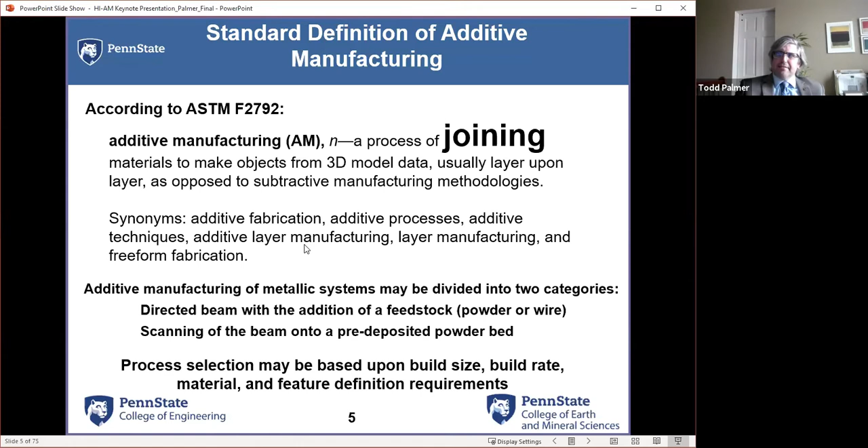So it's important to keep that in mind when we talk about welding and related topics. There's a whole range of different things—I'd be remiss if I didn't show the robotic hand from our friends at the Manufacturing Demonstration Facility at Oak Ridge, along with some other examples and work we've done at Penn State.

This was one of my most motivated undergraduate students. That was a front upright for a Formula SAE car that was designed and fabricated out of titanium. This student was also a great salesman, I would say, as he convinced EOS to fabricate this part for him for no cost. So he was a very good student.

It was very much a design exercise, but it came out being a very intricate type part, and into these large bulky components.

Now this is an electron beam, or what a lot of people will call a Sciaky type system, mostly because Sciaky builds the electron beam systems. It's an electron beam welder with a wire feeder, or in this case, two wire feeders. And what they're building here, in all likelihood, I can't say for certain, but they've been sort of showing this off, is tantalum. So they're feeding wire as their feedstock rather than powder, which was originating from here.

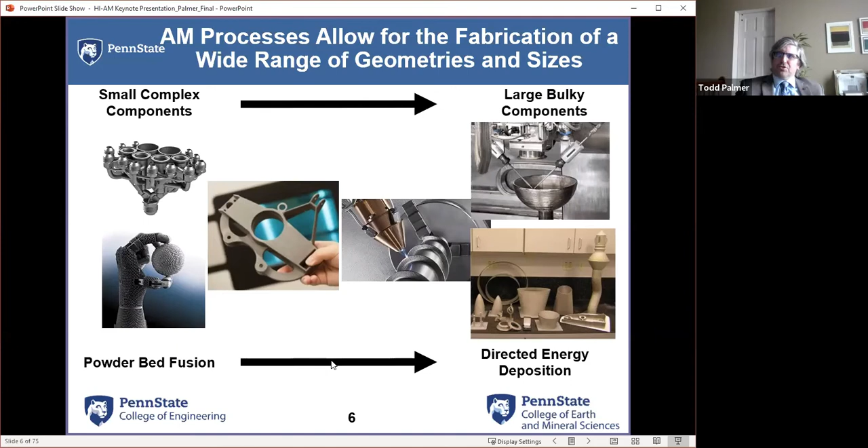Now, going from powder bed fusion to directed energy deposition, we have some differences. I'm going to get away a little bit from showing off the processes, where most everybody would go in this type of presentation, and talk a little more about what goes into the powder.

Now, when we start talking about powder, we have to think in terms of particle size distribution, or the particle size range. These are measured through laser scattering techniques. You can use image analysis techniques, and we're going to see that there's a couple different ways to talk about what goes into the powders.

But powder bed fusion powders in general are going to be spherical. They're primarily gas atomized. You'll see in the literature every once in a while where some people will use really spherical water atomized powders. Some people who really knew how to water atomize powder provided them powder.

Packing of the powder tends to be a little more important, because when we start looking at the physics involved here with the process, the laser absorptivity is really going to be impacted by the packing as the laser enters that powder bed. How that powder lays down, how it packs, how it sits together is going to make a big difference.

Now, powder size distributions versus directed energy, where we're flowing powder through nozzles and into a weld pool, differ. The powder sizes in powder bed fusion tend to be smaller. So we're looking at a finer powder size, 20, 30, 40, usually 20 to 30 microns, where most people will feel comfortable. We'll see a little higher size distribution if we switch from laser powder bed fusion to electron beam powder bed fusion.

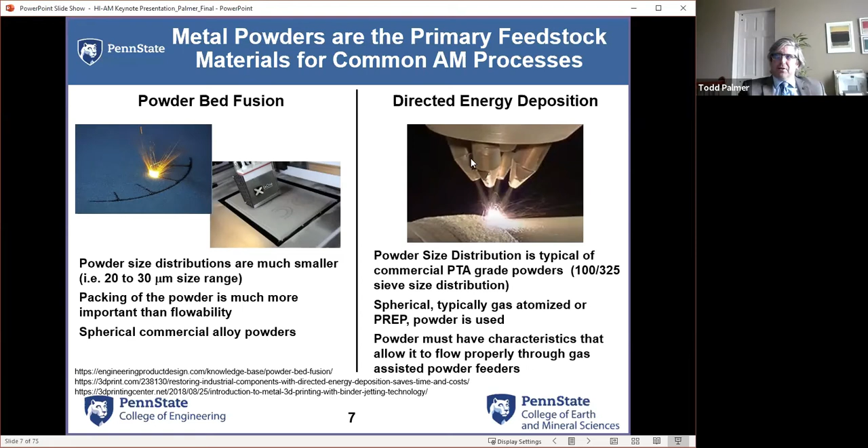Now, this is where I start with my Festivus-like listing of grievances as far as powders available. When we start talking about what powders are used in additive manufacturing for metallic type systems, what we really start looking at is basic alloy systems, sort of these generalized ones of aluminum, cobalt, nickel, steel, titanium.

And if I were to look at these alloys, putting my curmudgeon hat on, which I really don't have to most of the time because it's sort of the way I tend to think, every one of these alloys was developed for something else. Ti-6-4, I think it's the second of the titanium alloys to come out, a cast wrought system. H13 tool steel started out as basically a powder system for powder metallurgy. 316L, cast wrought. 17-4, cast wrought. Starting to get the key here.

Every one of these alloys was designed to be processed in a certain way. As a materials scientist or materials engineer, whatever you want to consider yourself, when people really start talking about materials, there are three words that should come to mind: process, structure, and properties. Those really govern the way we should approach materials and how we think about them. All of these materials were designed, and design of alloys and materials should involve how they're going to be processed up front. That's our boundary condition for it.

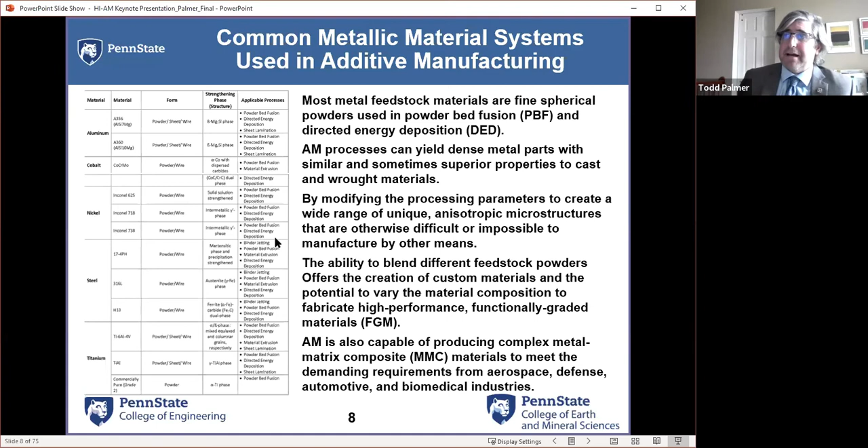And then we make things even worse. When we start thinking of additive manufacturing processes, we start thinking, hey, we can make some really nice trinkets. We can make some cool designs. We can make lattice structures. We can take topological optimization and cut weight and do all these things. But there's a point where you need to think about the complexities and what you're actually doing to the materials, because the materials were never meant to be treated in this way. I would typically joke that the designers of Ti-6-4 are rolling in their graves at what we're doing to the alloy system they developed and the things we're expecting out of them.

And I like this plot mostly because it shows all the really complex things we're doing. Not only from a computational materials standpoint of different things, and I'm not going to talk about it too much here, but really thinking of equilibrium partitioning and solidification, thinking of how a Scheil type simulation is actually a better way to predict the microstructures that we're seeing further down.

We're taking powder feedstocks, and we're going to go into a few points here of how complex most powder feedstocks are. Beam material interactions - we're taking a bunch of powder and melting it with a laser. I can remember my physical metallurgy professor back as an undergraduate. The first thing he said when he introduced the welding modules was that the best way to ruin a perfectly good piece of metal was to weld it. And what are we doing? We're taking these materials and welding them tens of thousands to hundreds of thousands of times. So we're probably not doing very good things to them.

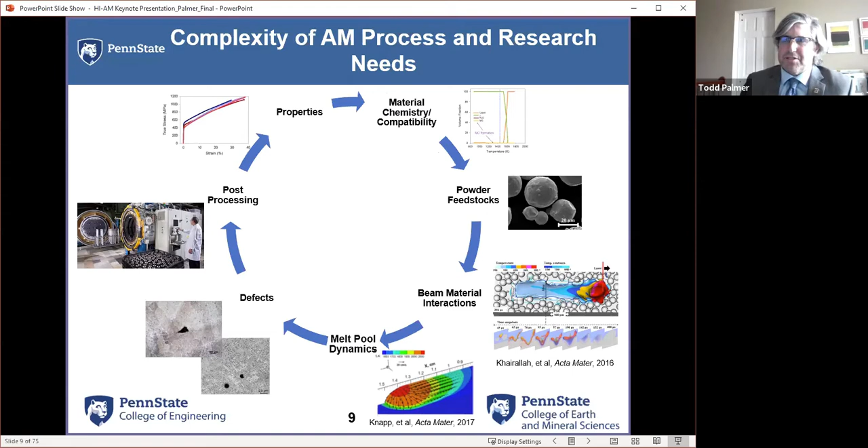So how do we get rid of these defects? Now we want to hot isostatically press these materials, and then we're going to end up with a certain amount of properties. So you add all that together - I put it in a circle just to show how these properties, the chemistry, and everything in these areas - there's a lot going on. Our ability to really predict what's going to happen in additive manufacturing is going to depend on this, and I want to start thinking of the powder feedstocks.

Going beyond that and thinking in terms of the powder feedstocks, we have a lot of things going on here. If any of you have run into Sean Kelly when he was at Oerlikon or EWI, or I think now he's at SLM, we used to sit and talk about these things. One thing he liked to tell people was that the interesting thing about additive manufacturing is that you're making the material at the same time you're fabricating the part.

Now, if we think of how components and complex components are made, usually my comment to my students in my introductory materials classes is if you can't weld it, you can't build it, you can't make it. So we usually start with some type of material that comes in a structural form. Steel companies, nickel companies, titanium companies, this is how they make their money. They sell you a plate, a bar, a rod, some other type of product form. Now it's your job to make that into something. You're either going to machine it, cut things away, bend it, form it, roll it, or weld it at some point in time.

In additive manufacturing, we're sort of taking that all out. So the idea of geometries and features and how they affect process structure property relationships becomes really important. So there's a design component.

As a materials engineer, as I said, I've been working for over 20 years now in the field, and it was always amazing, especially as a welder. This goes back to my days at Lawrence Livermore, working DoD programs at the Applied Research Lab at Penn State. The last people in the room were always the welders. So decisions were made on design and everything else, and the only time I was called as a welding engineer was when something broke.

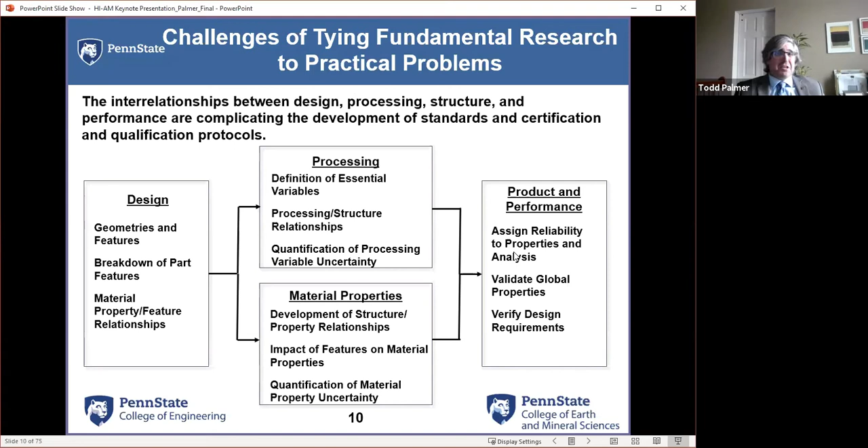So the risk is definitely assumed, but product performance and reliability, it all comes down to, and because I'm talking about powders, it's going to come down to what you do with those powders. So how are you going to specify the powders? First off, how are powders made? Not something we really run into a lot.

Here in Pennsylvania, and I see one of my students on the list here of attendees, we're a little fortunate when it comes to the additive manufacturing field and the powder field, because we actually have probably about everything we would need as far as people who make powders, probably within about a 3 to 4 hour drive of us. There aren't a whole lot of powder companies out there who we can't really come and deal with. If I drive about 6 hours, I go to Glens Falls, I can find somebody who designs atomizers.

So I tend to think of 3 ways of atomization. There are some other different ways to make powders—you can mill them, you can do a lot of things—but they don't really give you these spherical powders that we seem to really be demanding for additive processes. The primary method is going to be gas atomization, where you take a melt, run it through a nozzle, hit the nozzle with high impact gas, and it creates particles.

Plasma atomization usually starts from a wire feedstock or some other type of feedstock. You can use plasma torches—I think the company's name now is 6K Technologies, they tend to use this type of process. Instead of plasma torches, in some cases, they'll use microwave generators to produce powder feedstock. One of my favorites is centrifugal atomization, where you take a rod, spin it at about 3,000 RPM, put a torch on the end of it to melt the tip of the bar, and as it's spinning that fast, it centrifugally throws off powder beads.

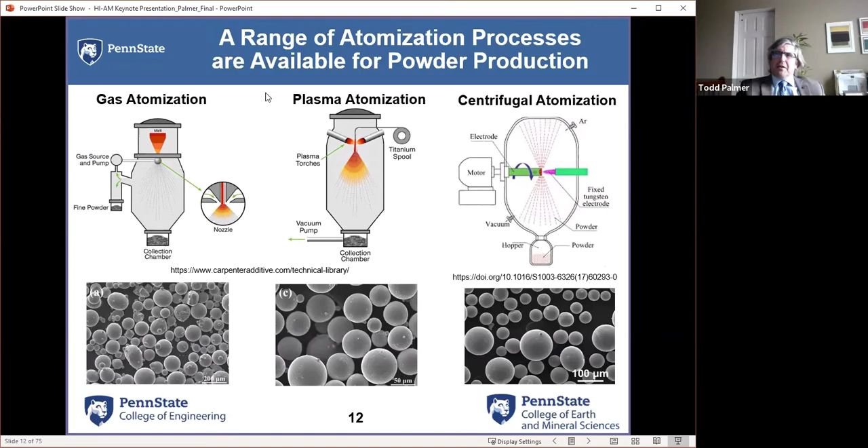Now, when you buy something—I'll say Sandvik, Osprey, and Carpenter Technologies, or Carpenter powder products. If you want to buy gas atomized powder, those are some of the people you go to. There are other people out there; I don't want to name anybody without naming others.

But when you get there, the question is: how do you specify that powder? So you're going to buy some powder, and you want to know—okay, particle size is definitely a start, and then all of these other things.

So powders, because you have all that surface area and all these powder particles, you have all kinds of different things happening. Composition is one that maybe you can control. Homogeneity—how similar are the particles. Contamination is another one, but this internal structure is a tough one, and we're going to show you how to measure that—not an easy thing to measure. Flow and packing, now we're starting to talk about things that we could potentially use.

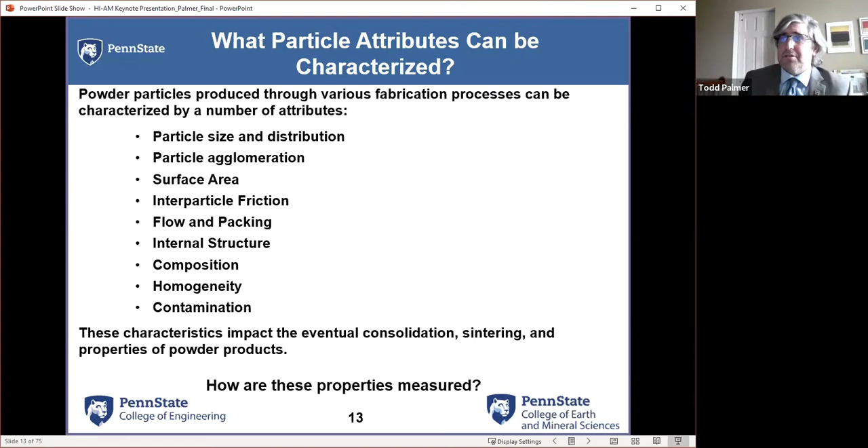So how are they measured? Now, the first place we usually go is right back to the traditional powder metallurgy industry. These are people who press parts, sinter them in furnaces, sell them primarily to the automotive industry—basically iron powder metallurgy. Very simple tests: Hall flow meter. Put 50 grams of powder into a funnel with like a 6mm orifice.

Have a stopwatch, put your finger over the orifice. Start the stopwatch, pull your finger away, and measure how long it takes for the powder to fill a cup. You can measure the apparent density in that cup, basically how much it gives you to fill that cup.

Tap density is very similar to filling a sugar container. You run out of room, you shake it up a little bit, you get more packing. You can measure that tap density, angle of repose, particle size measurements, and even image analysis. These are ways to characterize powders. They're very simple tests, but they were really designed to measure a powder's ability to fill a mold with the same amount of powder in the same amount of time each and every time.

This doesn't really reflect what we see in powder-based additive manufacturing, where we're taking a blade and basically skimming to make a powder layer, or flowing powder through nozzles.

So particle size distribution is the first place we start. It's a fairly common, pretty simple test. We can use laser diffraction techniques where we disperse a powder and look at small angle and large angle scattering to get an idea of the distribution of particle sizes.

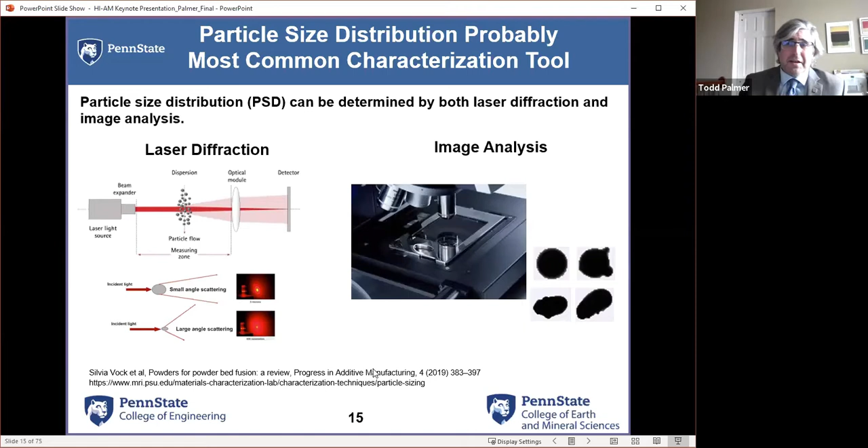So these are some actual backlit images of powder particles. How spherical are all of they? Not as much as we would hope.

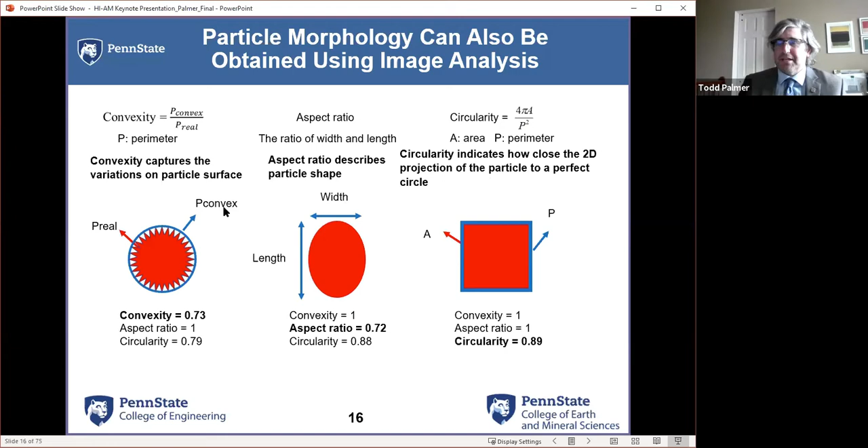That lets us start to think about particle morphology. Convexity is one, which is basically variations on the particle surface. Aspect ratio tells us how close it is really to a circle, and circularity is how close that 2D projection can fit a perfect circle. When you start looking at these, you get some wide variations in particle morphology.

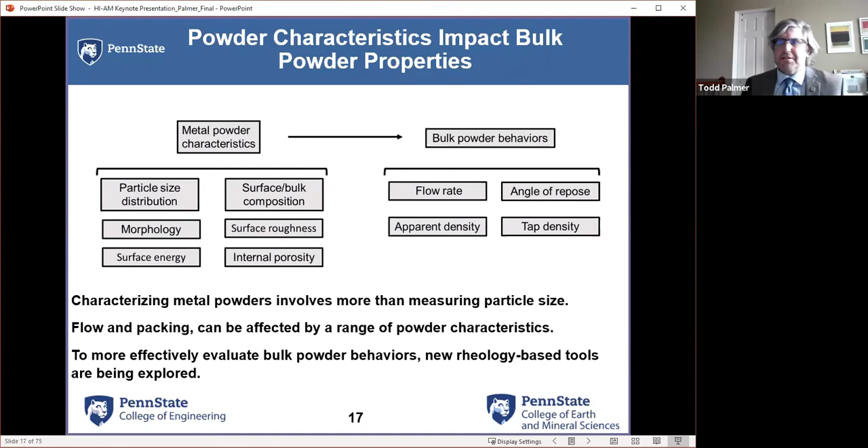Now particle size and morphology are only a couple things. That gives us the particle size distribution and the morphology, but there's a lot more that goes into these bulk powder behaviors we're talking about. We know flow rate, angle of repose, all these general things, but there's things within the powders going on there, and that's where some of these newer tools are coming in.

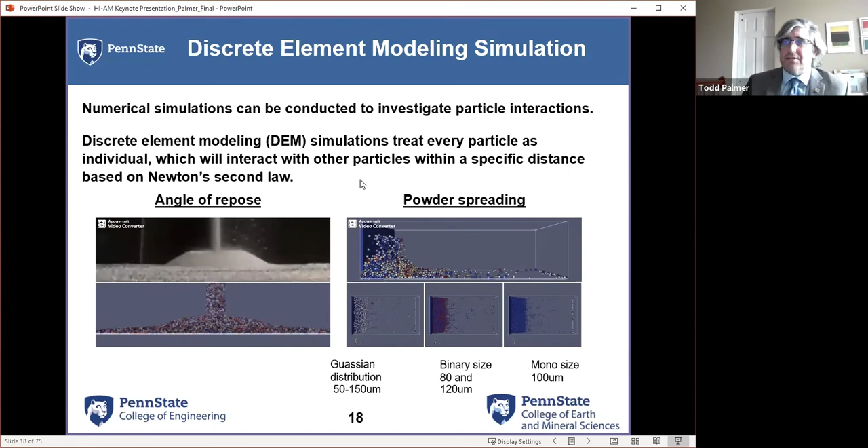So this is where we need to think about the powders. This is getting a little more into one of the studies we've been doing, and we're really getting ready to publish a lot of this material: what happens if I change the gas that I atomize with? It's a common consideration, primarily as a way to adjust my composition. I may also change atomization gases from a cost perspective.

Nitrogen is a whole lot cheaper than argon. If you've bought argon recently, you start to see—and I bought a lot of argon to build a lot of the components that we built—it gets costly pretty quickly.

Now, just looking at these powders, the chemical compositions, the chemistry, I have two different lots. I chose two different manufacturers that gave me two different nitrogen atomized 316Ls. And I actually found one producer who I think they were playing around, and I got lucky. They just happened to have some argon atomized 316L, using argon as the atomization gas. So I said, hey, send me that.

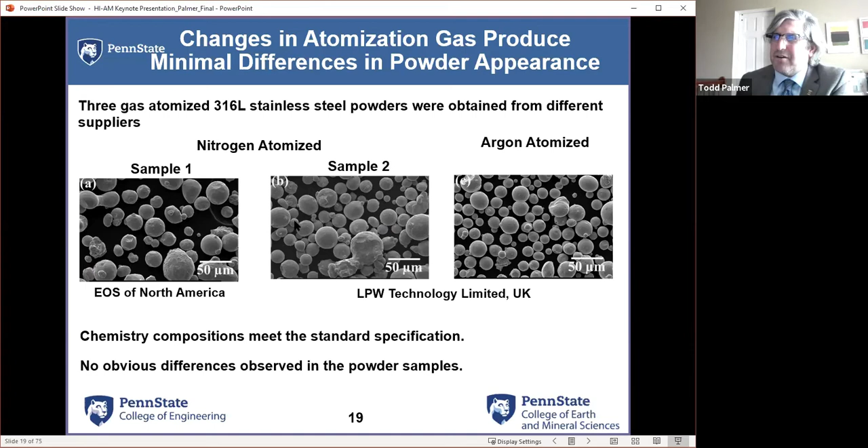We want to take a look at what happens, initially from a chemistry standpoint. But when we started looking at the powders, we started saying, you really look closely at these, they are different. There's some difference there, but it's not anything I can really quantify or understand. They just sort of look smoother. Now what does that mean?

So we looked at the nitrogen concentrations, and if you've done any welding of 316 or really thought about austenitic stainless steels, you start looking at these and you're like, yep, chrome looks good, nickel, manganese looks good, silicon, molybdenum is there, definitely L's with the low carbons, sulfur's decent. Oh, we see a big difference in the nitrogen levels. And really, as a welder coming out with stainless steels, that's usually a big red flag that something is going to be different.

Nitrogen is really a well-known austenite stabilizer. We're going to see when I start talking about the PH grade stainlesses that this is a big deal. And even here we see, these are just some engineering stress strain curves. Low nitrogen levels, that's pretty significant, over 100 megapascals really in yield strength coming out there, and probably right around the same, maybe a little less in ultimate tensile.

There's some real differences in just how we atomize the powder, but if I were to just buy these powders as an idea of meeting the specs, I would tend to assume that they were all the same. Obvious that they're not. You'll notice I also added a couple other columns down here identifying chrome equivalents, nickel equivalents. These are sort of welder shortcuts.

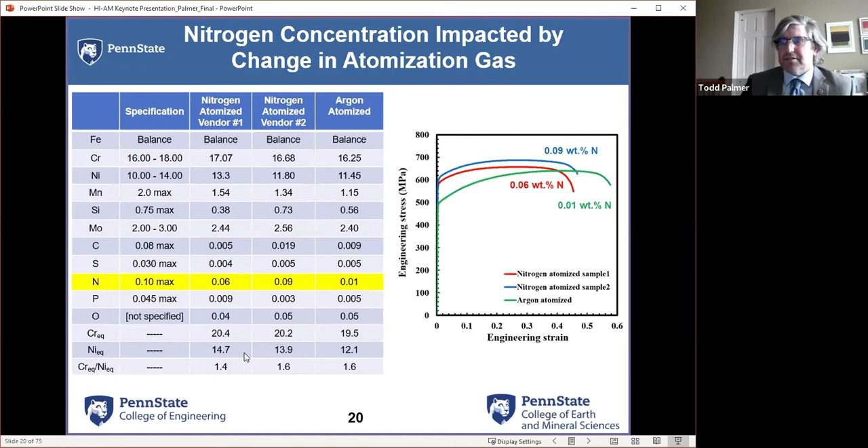So what it gives you is an idea of the other alloying elements that might contribute. Chrome is a ferrite stabilizer, nickel is an austenite stabilizer. And so how these different alloying compositions can impact that. And what we tend to see here is really the impact of the nitrogen, the increased nitrogen levels versus what we see in the argon atomized.

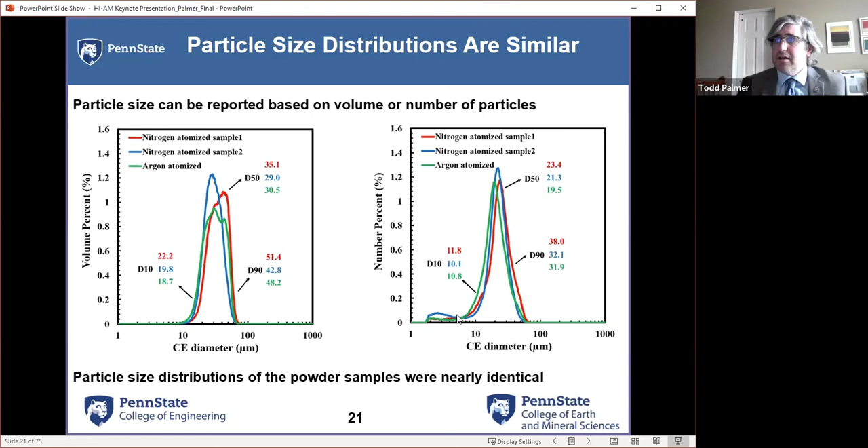Now if we look at these three powder lots, if we're looking at it from a particle size distribution, we're not seeing any real difference. We're seeing basically similar volume percents, similar number percents, a couple different ways. So volume percent is for each of these diameters, the volume of the powder that's measured, the number density. Usually looking at things on a number density distribution will sort of amplify the presence of fines, and we see some of that here.

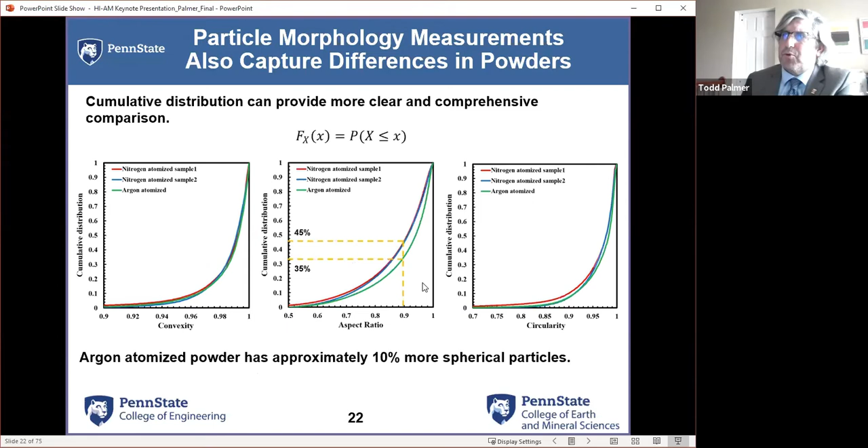Now, when we start looking at morphologies, what we do is we look at it as a cumulative distribution. And one of the things that really came out here is this change in aspect ratio, where the argon atomized is showing us a much higher circular shape. So its aspect ratio is much closer — a portion of the particles, their aspect ratios by about 10% here are more spherical. So we're starting to identify some differences between an argon and a nitrogen atomized powder.

We don't really see too many differences here. Everything was pretty much conducted the same. It's not anything that we would really run out and say, there's what our difference is. Everything was pretty much the same.

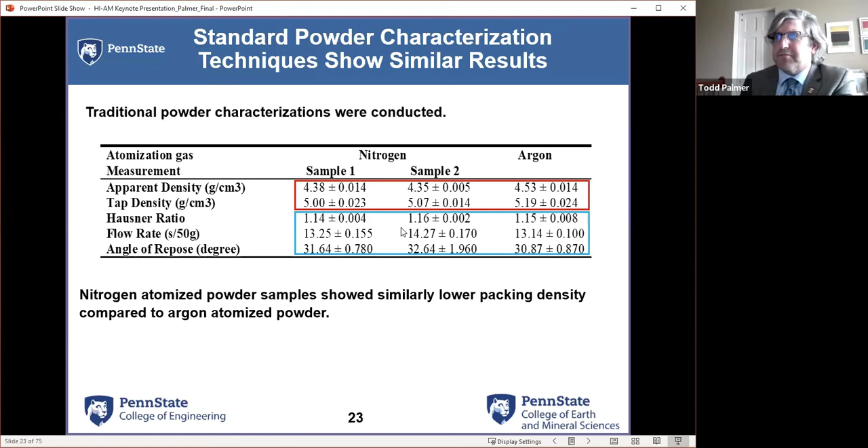Now, this led us into sort of trying to take a look at rheology tools, because we're seeing differences in spherical shape. We're sort of saying, okay, do these powders really vary? And so when it comes to rheology, there are three that I want to focus on. One is a rotating drum method, where for the most part, you take a drum of powder, you take a known volume, and you rotate it around.

So what you're seeing is the powder acting like a liquid. It climbs up the side and then collapses down. That gives you an idea of what we consider the avalanche angle, or avalanche energy. By measuring that angle, it gives us an idea of the flowability.

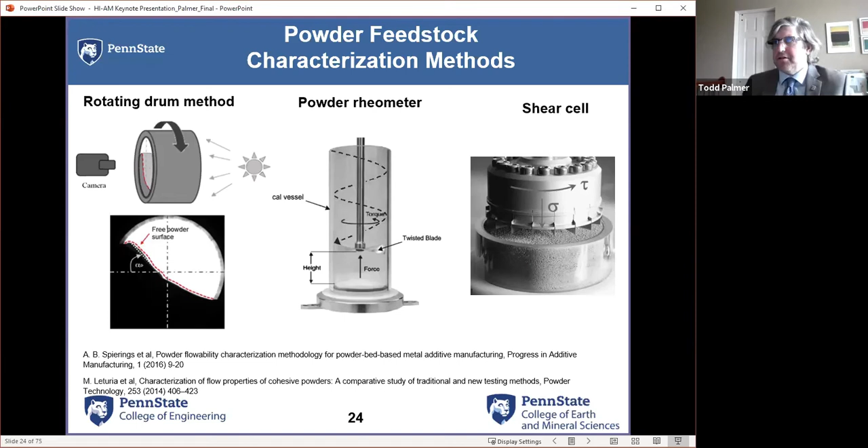Another way is to take a blade and run it through a column filled with powder. A shear cell is another way to do it, and this is primarily a way to measure permeability. What's happening is the shear cell goes down under a certain pressure, and it measures the forces and torques as it turns. Or you run gas flow up through it, and measure the amount of gas flowing through.

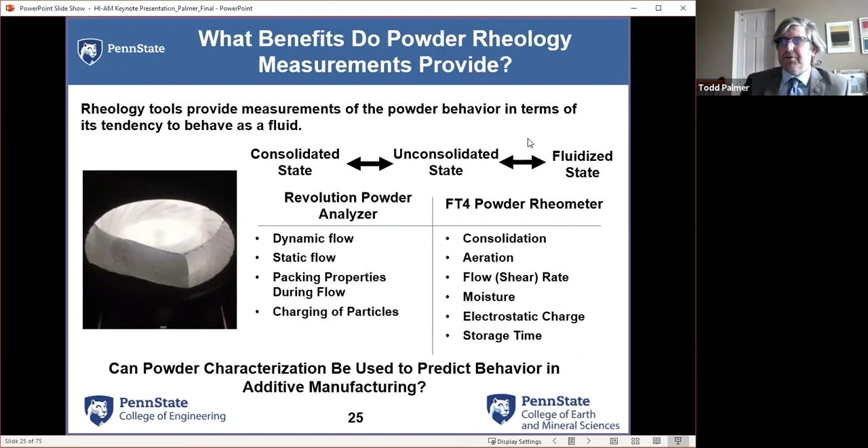So these were the two systems we looked at, giving us the ability to see how these powders behave as a fluid. Flowability is one measure, but I'm trying to take a step back, because terms like flowability and spreadability are really misused. A lot of people are out there claiming they can measure spreadability or flowability, but it's not really that well defined.

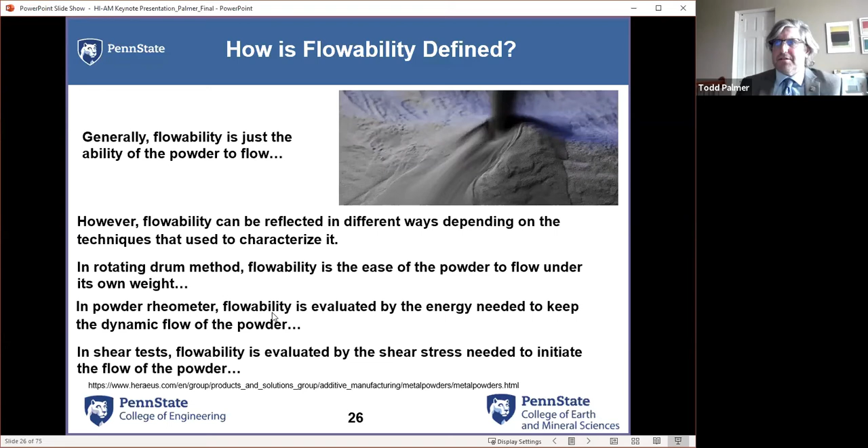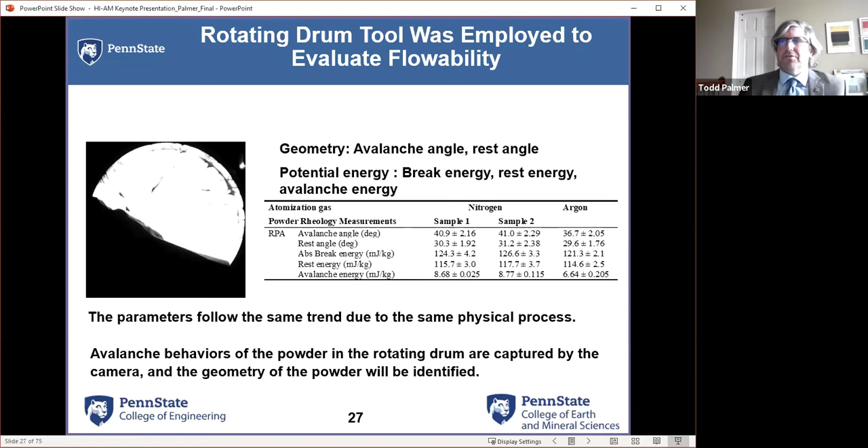These different tests measure flowability in different ways, using different characteristics or measurements to define it. In the rotating drum, we typically see the avalanche angle - it's a geometry-based thing. We found that this simple test, rotating a drum and measuring the avalanche angle, was actually pretty good at finding differences between powders. The argon powder, with a lower avalanche angle, shows better flow characteristics than the two nitrogen powders. We definitely see that when we apply it as a cumulative distribution - higher resistance means lower flowability. This is a pretty significant difference in flowability.

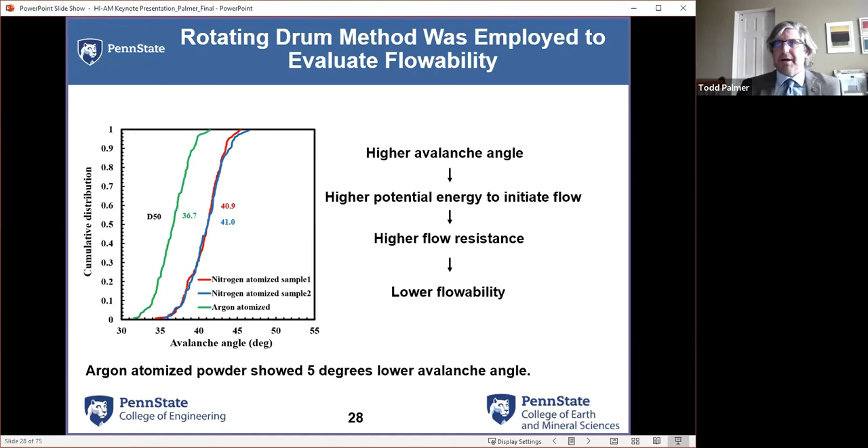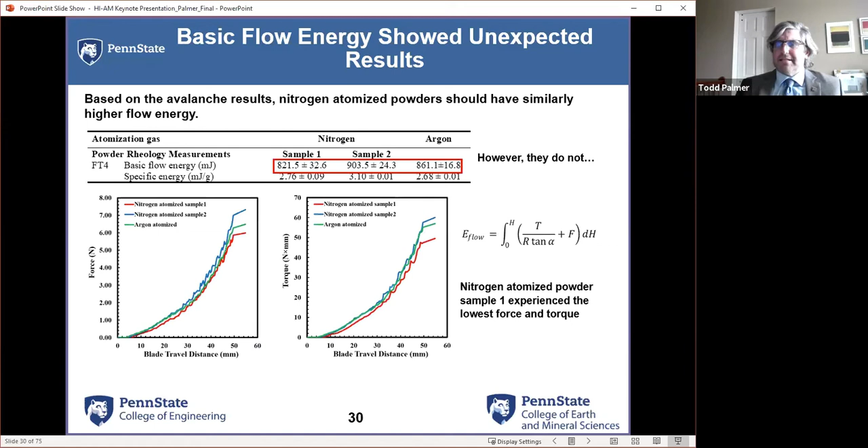So the argon atomized powders, using rheology, let us start discerning these differences. But when we looked at a more traditional powder rheometer with a blade, we didn't really see these same differences, surprisingly. We didn't get the same type of results. We found there was no real trend - they were sort of in the middle, or displayed really different trends. One of the nitrogen atomized powders suddenly showed this different type of process.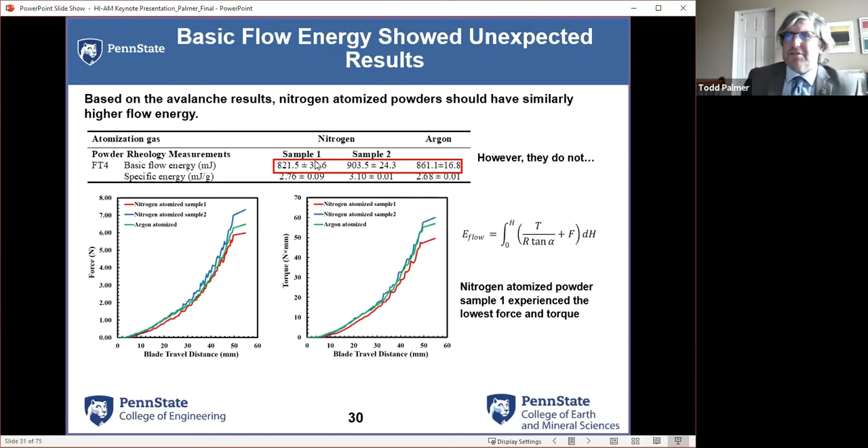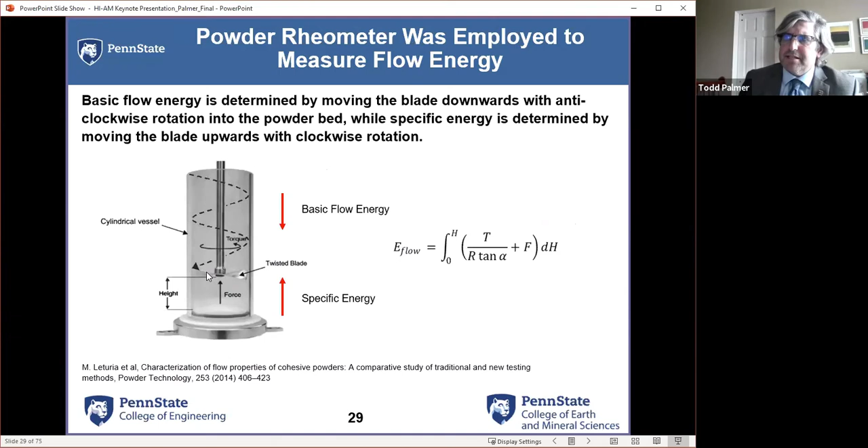Now that we saw these different results, we started asking ourselves, what's going on here? So how is this measurement being made? I'm looking at a blade pushing powder. One of the things that goes into this measurement is the mass of that powder in front of the blade.

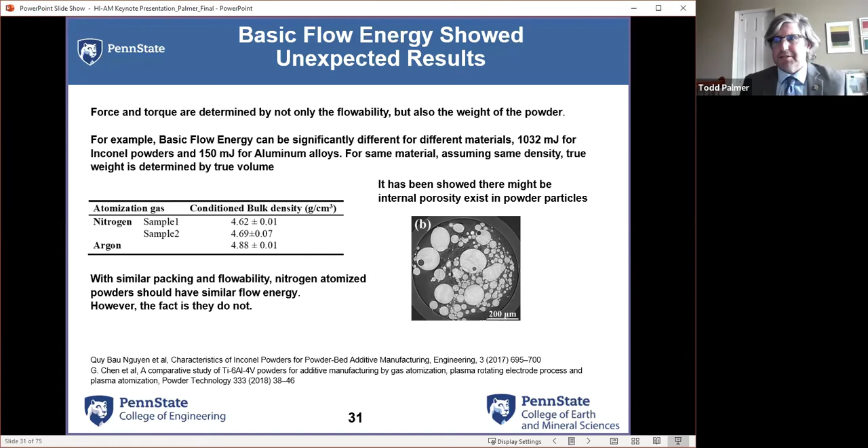So a couple of my students started looking at some other powders - this is a cross section. If you really start looking at powders, you'll see they're not as dense as we'd hope. A lot of them have porosity in them, and even though that porosity has a certain volume, it means the mass is actually lower. So the density and these numbers that go into the calculations - these systems are really measuring very few things. They're doing a lot of calculations based on a limited number of measurements to come up with these different parameters.

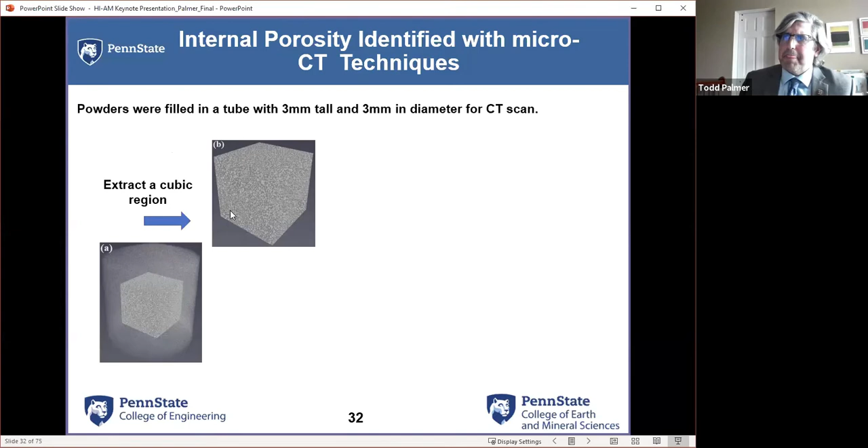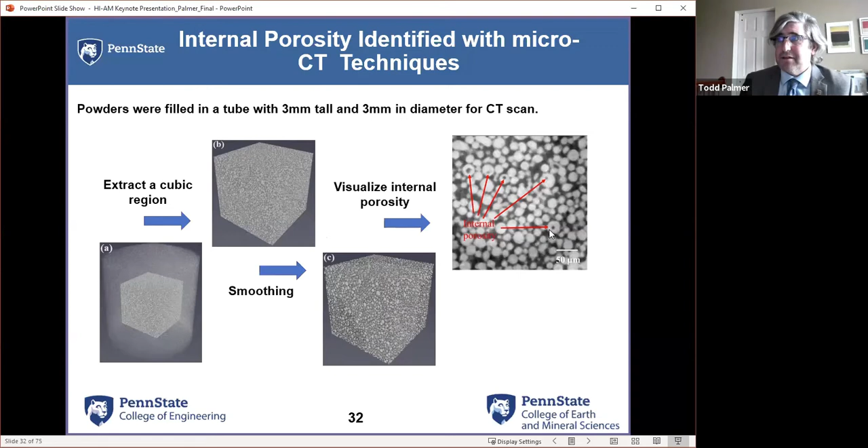So we wanted to get an idea of how much porosity is actually in powders, because you hear people talk a lot about porosity in powders. Some people claim that porosity carries over into porosity in powder bed fusion or additive manufacturing - we're not going to talk about that right now. But we took some powders, filled some 3mm by 3mm tubes, and CT scanned them. CT scanning is really cool - it's a way to look at differences. But when we pull individual scans out, we see there's a lot more porosity in these powders than we ever would have thought.

One of the things you'll hear a lot is that there's a tendency for much higher levels of porosity in an argon atomized powder versus a nitrogen atomized powder. Part of this is that a lot of the original theories in atomization based on porosity in powder particles were based on gas absorption—argon isn't going to be absorbed, so it must be forming more pores.

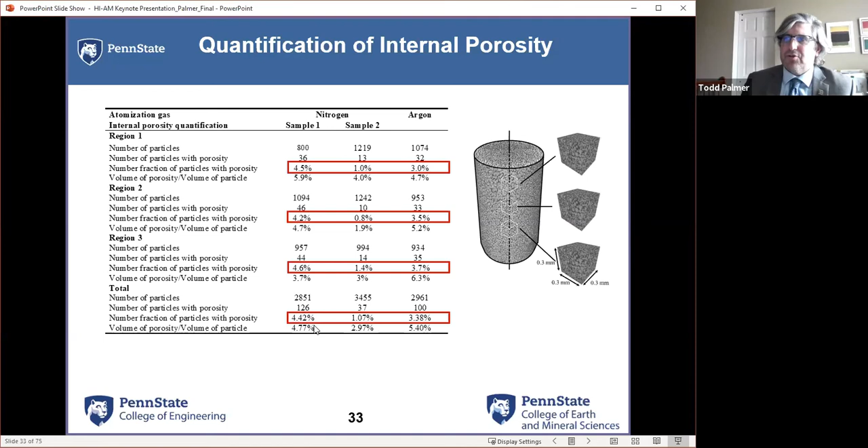There's some other bag breakup and other methods to think about it, but what we tend to see is that between about 3 and 5% of the particles by volume have porosity in them. That's 3 to 5% error in mass, and that can be driving some of the differences we had.

So we start looking at some of the different number fractions and how they come with a cumulative distribution. We can start quantifying it, and then start thinking in terms of other ways. So we have some pores, and our mass isn't what we really thought it was going to be.

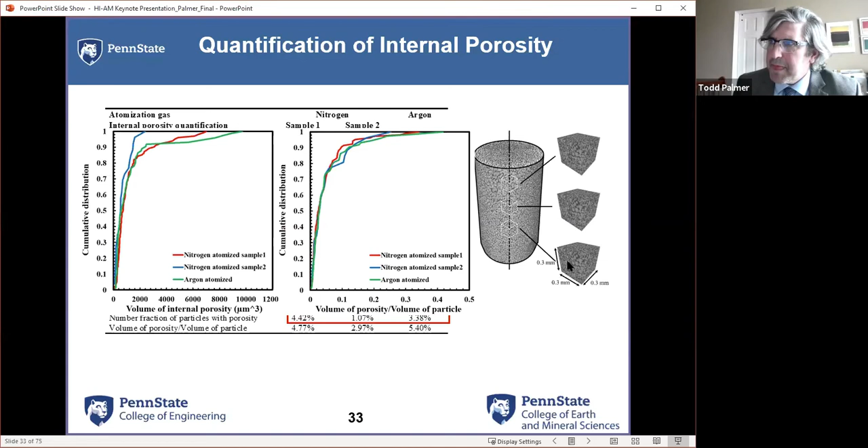The next thing to think about is I have a whole lot of powder in here. One of our issues initially, and this is a better example to see it in, is that the void space is not just internal to the powders—it's also external to them, and it sits in how the particles pack. A way to measure that is through a permeability test, where you flow air through the powder with a normal stress on the surface.

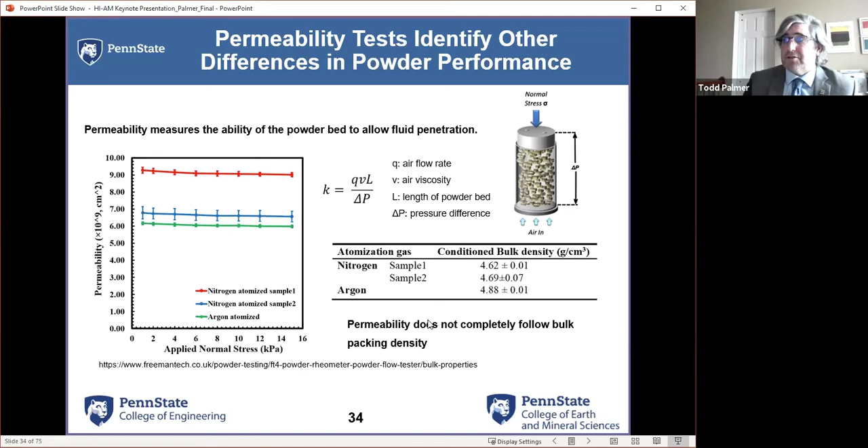What we tended to find here was that there were differences in permeability between the powders, primarily that one of the nitrogen atomized powders had a much higher permeability, which means it was really a difference—they didn't follow the bulk packing density.

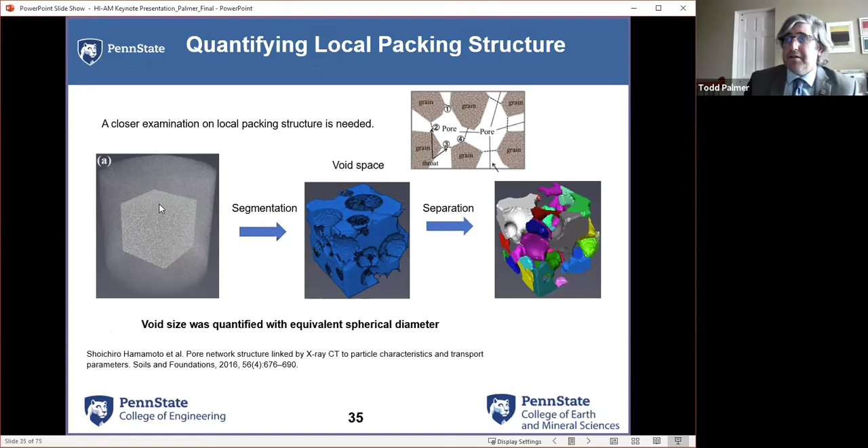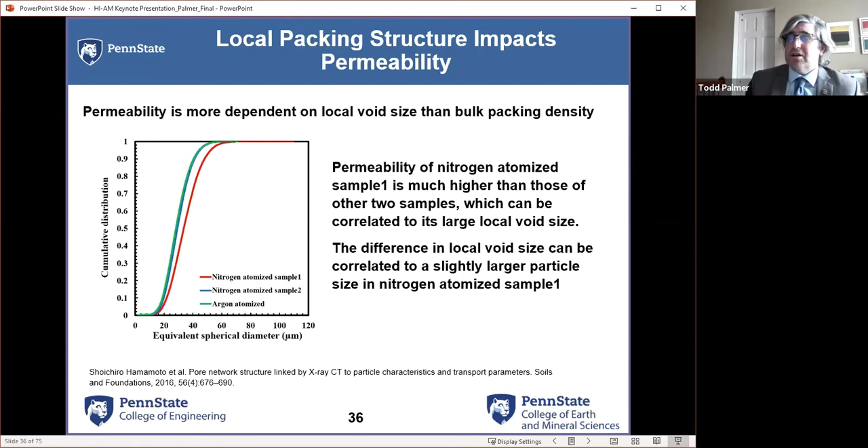So we went and figured out the void spacing, which gave us some idea of how different powder particles were. By taking this, we tended to see that permeability is more dependent on this void spacing rather than what we might consider as bulk packing density, partly because some of that bulk packing density is being impacted by that internal porosity.

So we can start to see that powders are a lot more complex than what we would have initially thought. Being able to characterize them and understand how they're interacting with each other is going to impact things down the line like laser absorptivity. I have another paper that I'm not going to talk about here, which I worked on with some people from NIST in Boulder, Colorado, trying to quantify the differences between spreading and packing of powders and laser absorptivity. There are some definite relationships to keep in mind.

Now let's go back to this atomization gas. I'm going to switch gears here a little bit and go to a precipitation hardened stainless steel. These are some really common ones that are out there, and what these steels require is post-processing.

So going back to the powder feedstock and what gas we're choosing for that atomization gas, the processing gas—we hear a lot of people talk about processing gas, but we've found, especially in powder bed fusion, that it's not quite as important or as big a factor as this atomization gas. This is a way to introduce large amounts or really cut back on the amount of diatomic gases you may have in your feedstock, but all of this impacts post-processing.

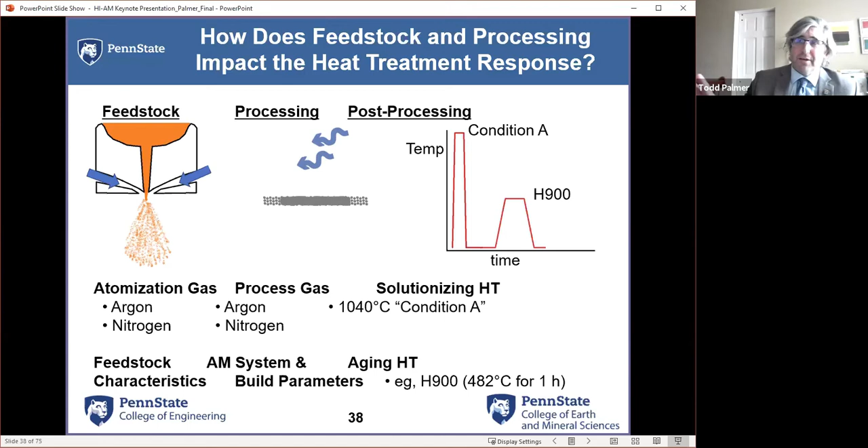Now this is one thing, if I'm going to get up on my soapbox—there's a couple different ways in science of going about this. There's being the first one to report something, and then there's the issue of whether it is correct or incorrect. There was a lot of literature, a lot of papers written initially on these alloys that over the course of time have been proven to be incorrect and have led us in the wrong direction. My sole reason for going into this in-depth analysis was to try to correct some of that in the literature. I never would have done this depth of analysis without that.

So we see almost an order of magnitude difference in nitrogen between an argon atomized and a nitrogen atomized PH grade powder. Now these mechanical responses are taken from the literature. If you're a designer, there's no way you can start designing for PH grade stainless steels or 17-4 chrome nickel in this case, with such a wide disparity in the as-deposited levels.

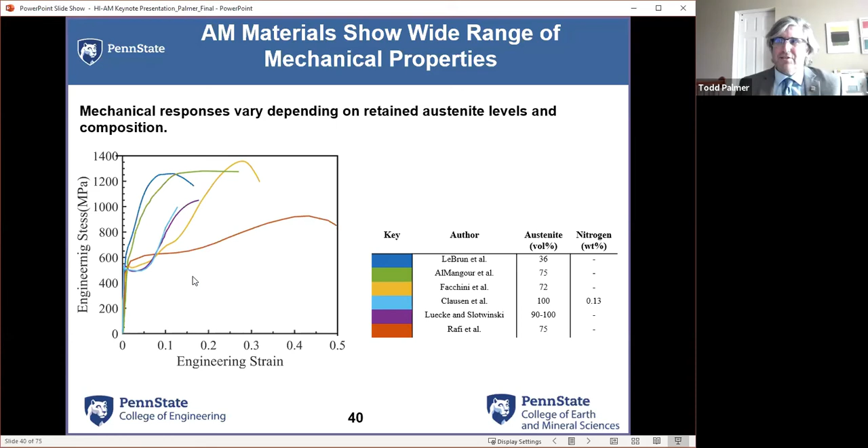We found that these are based on retained austenite. PH grade stainlesses should have primarily a martensitic microstructure. We're going to find that if you add a lot of nitrogen, you start retaining large amounts of austenite, so you've got martensite and austenite. The austenite is going to transform with strain, so you end up with these TRIP-type effects.

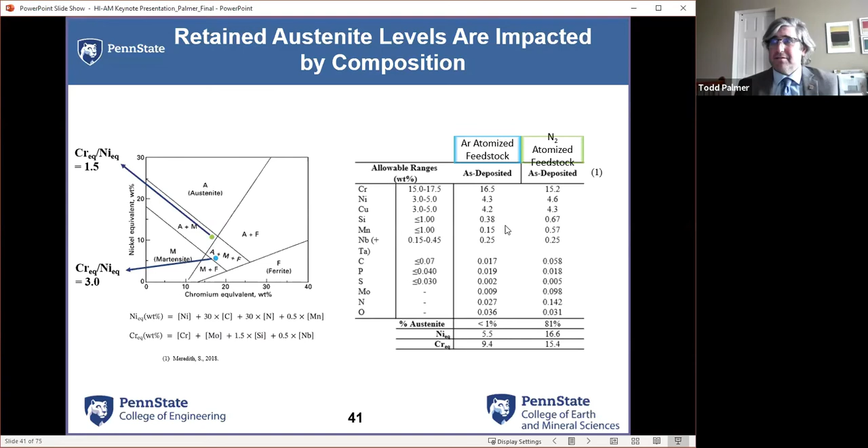Now, if we start thinking of the composition, we have argon and nitrogen atomized. We're going to go back to a welder's tool, the nickel and chrome equivalent issue I talked about before. Just by changing the nitrogen amount, I've gone with these letters representing solidification mode. I would expect something to solidify as austenite, or as martensite, or ferrite. What I've seen here is that I've changed the modes at which my microstructure should form. Both of these alloys meet specifications, so it becomes an issue of how we can address that.

Now, if we look at computational thermodynamics, just pulling out ThermoCalc and running some pretty straightforward calculations, we find that the argon atomized actually has delta ferrite forming out of the liquid. You can see remnants of this in the as-deposited materials. In the nitrogen atomized, it solidifies as austenite. So we have completely different microstructures that form. Copper phase is at a little lower temperature. What we start to see is our carbides and nitrides starting to impact here as well. The other thing to look at is there is thermodynamically a small amount of austenite that could be stable even down to low temperatures, whereas we see it basically disappears in the argon atomized materials.

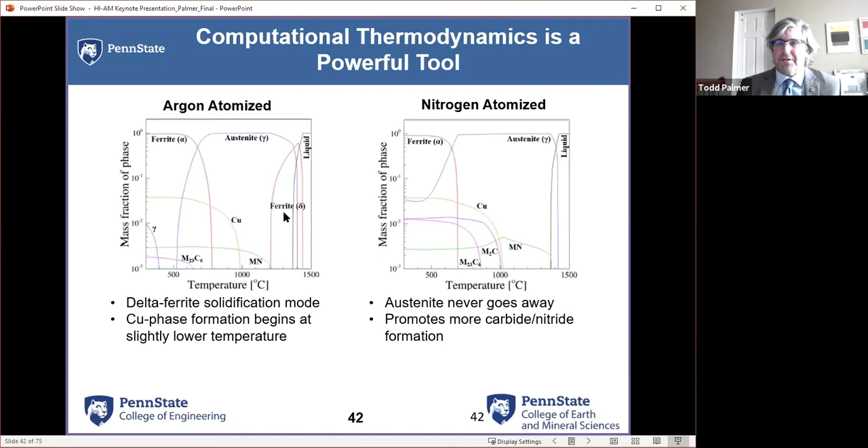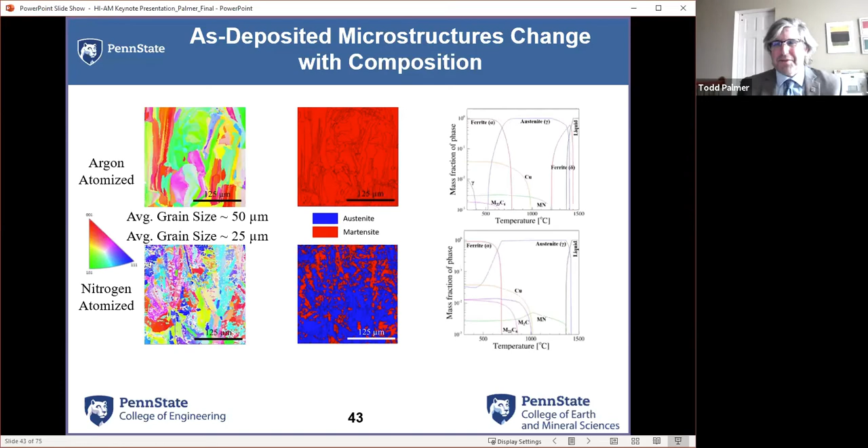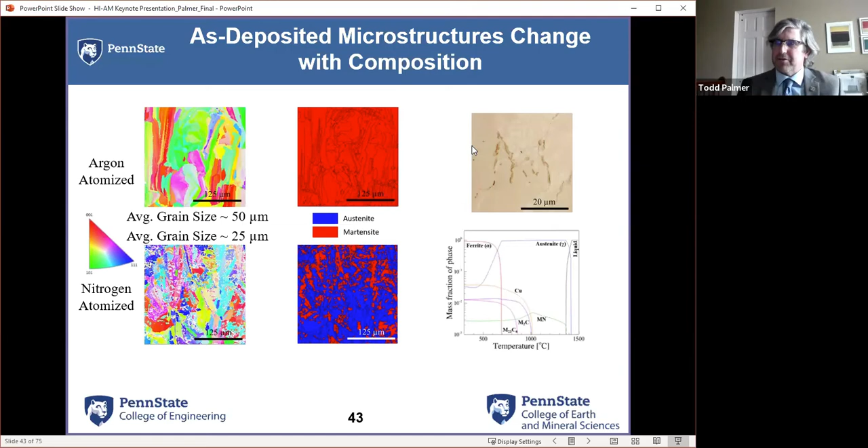Now, a little trick here: the retained austenite will transform to martensite when you polish it. So in order to obtain these nice, pretty pictures with our EBSD, we had to ion mill the surfaces. We went through polishing, went to a colloidal silica suspension, and when we tried to look at the EBSD with that, we found that everything was martensite. But XRD had told us before that it was austenite. So we actually had to revise our sample preparation procedures in order to see this. And that's a little bit of that delta ferrite in this microstructure, so we have evidence that it's there.

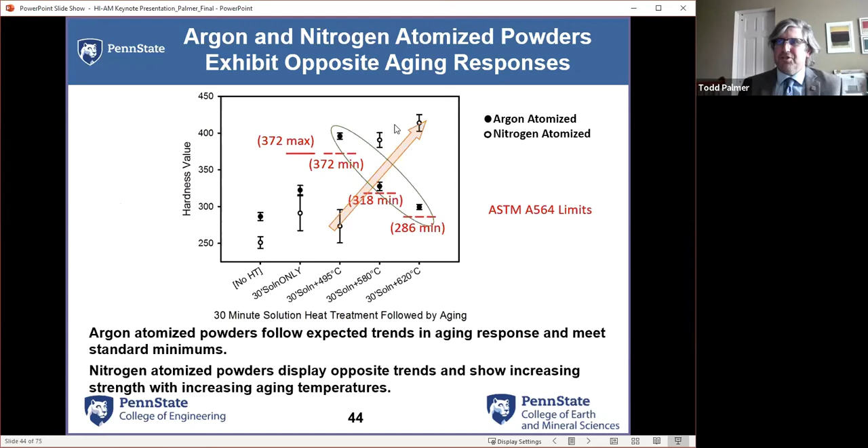Now, what really flummoxed us a little bit was the appearance of all this retained austenite when we tried to run these through traditional post-process heat aging treatment. You have to solutionize and age the materials afterward to obtain the properties you want. We found that the argon atomized behaved as expected, right on with you should get to peak aging at about 495, and it should decrease as you move down. Nitrogen acted in the opposite way, which really got us thinking, okay, why is that? It's telling us that we actually underaged when we thought we were peak aging in the nitrogen atomized. We had to keep going up in temperature, and we found we end up with a peak aging condition matching hardness somewhere around 620 to 650 degrees C. So the literature was telling everybody that you couldn't age nitrogen atomized materials. We really came to say you need to age them properly is a better way to put it.

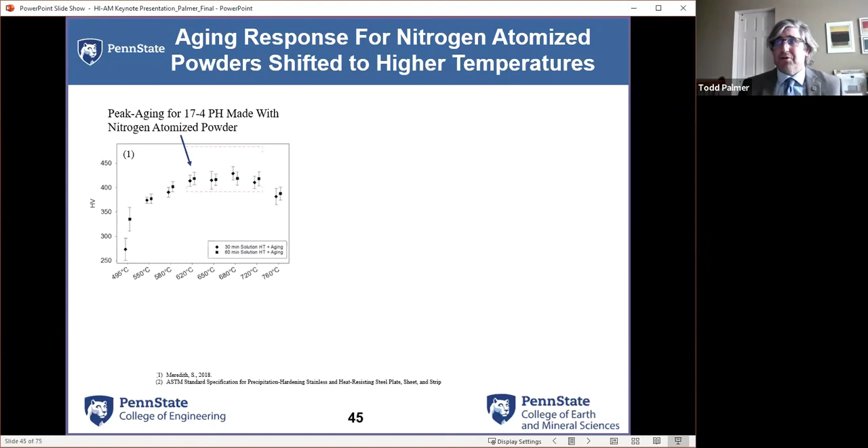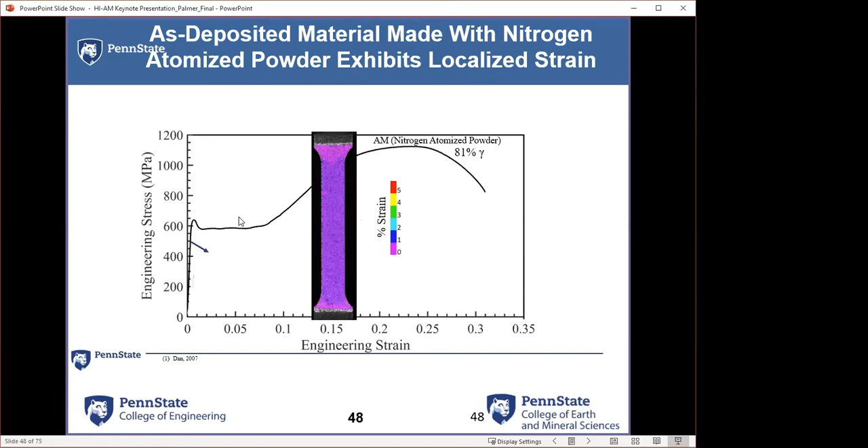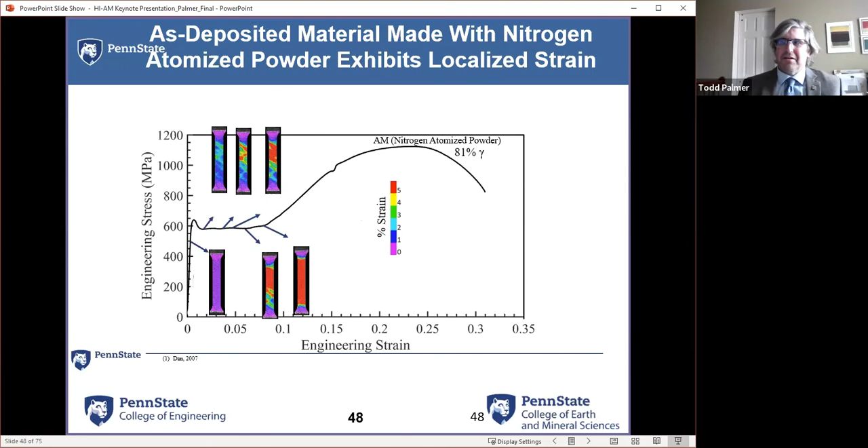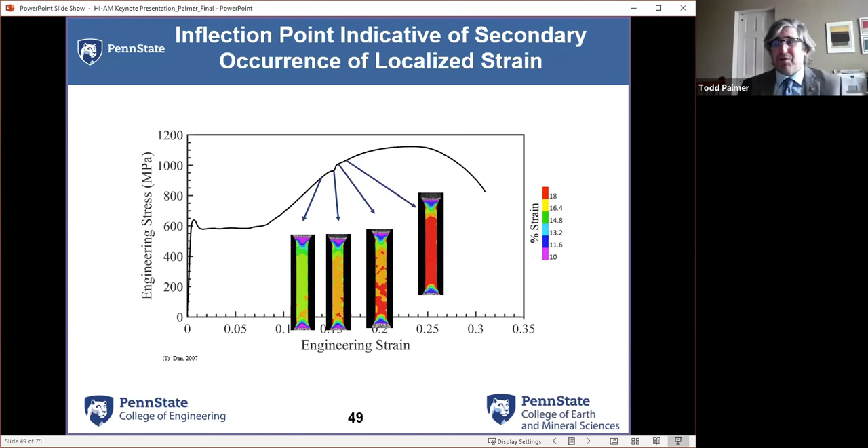Now let's go to the nitrogen atomized powders. That retained austenite is going to give us the fun stuff here, where we start looking at this interrupted yield point, and we start seeing the presence of Lüders bands there. And then as we go up, we see it again. So we see a couple places within the curve where we're actually starting to convert that retained austenite through strain-based processes into martensite. And what happens at peak aging? The nitrogen atomized, even under peak aging conditions, we have a little interrupted portion where this type of inflection point in our nitrogen atomized yield string, that is transformation of that retained austenite.

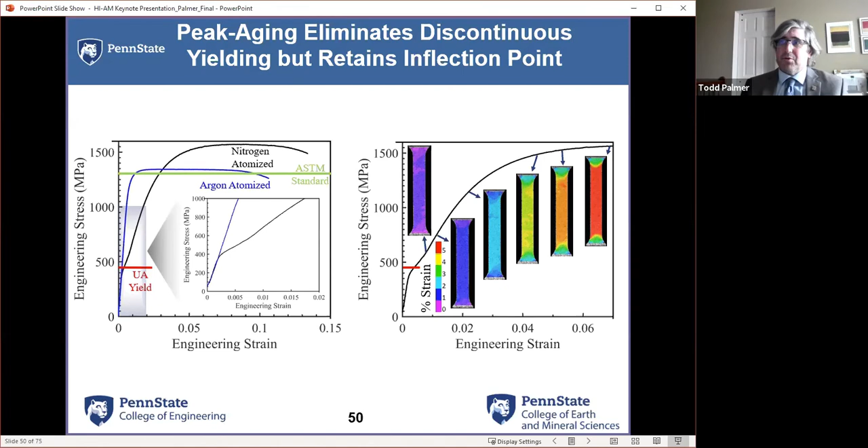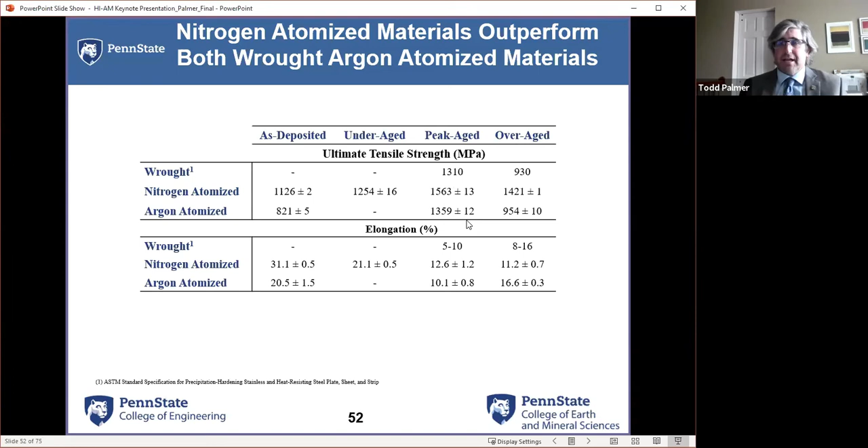So we can beat the standards, but this was one that I wanted to talk about, and I make a big deal of this. ASTM came out with a recent standard, and what they did was they limited the amount of nitrogen. They basically precluded the use of nitrogen atomized powders, even though if we look at it, we can obtain significantly higher strengths. And there's work being done looking at corrosion resistance of some of these nitrogen atomized powders, and they are extremely attractive for a number of ways. So by understanding how to process these materials, and we get a little better idea at peak aging of how much stronger the nitrogen atomized are, how much more ductility they have. There are a lot of benefits to thinking of nitrogen atomized powders or high nitrogen levels versus argon atomized levels.

So what I do want to talk a little bit about is some other types of compositional variations. And I'll try to keep this short because I know I'm really running over and probably running into your lunch times in Arizona, and I apologize for that. I get excited about this and you can't stop me. So you can ask my students who are here, they'll attest to that.

But one thing that's been bugging me for years was a common alloy, alloy 625. And when I looked at the standards, I was always like, wow, that seems to be something rather broad and curious. Why would you allow up to 5% with no minimum? You know, it's like, that's a lot of iron. It's got to be doing something. So I was constantly sort of told it's not a big deal. They let it flow. I never quite bought it.

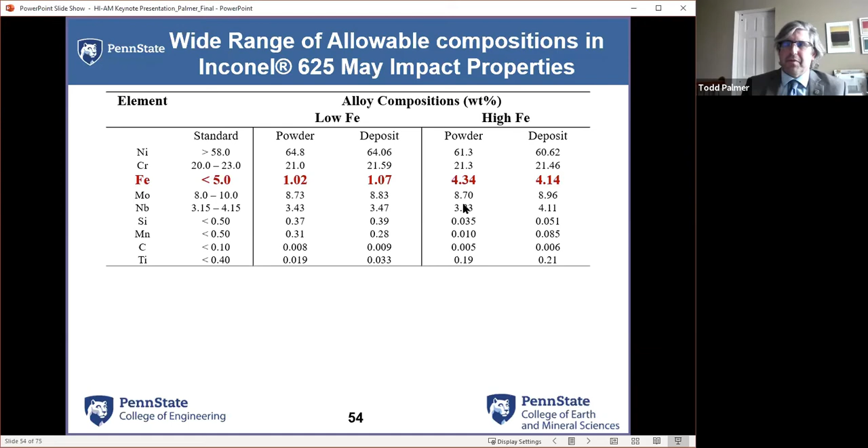So when we started doing some of the additive manufacturing stuff, I had a small program and I went to one of the powder manufacturers and I convinced them to find me two heats, one with low iron and one with high iron. And we built some parts with it. And so we did some differences in the powders. We always have to take pictures of the powders anyway. So a lot of satellites, some interesting stuff on the high iron content.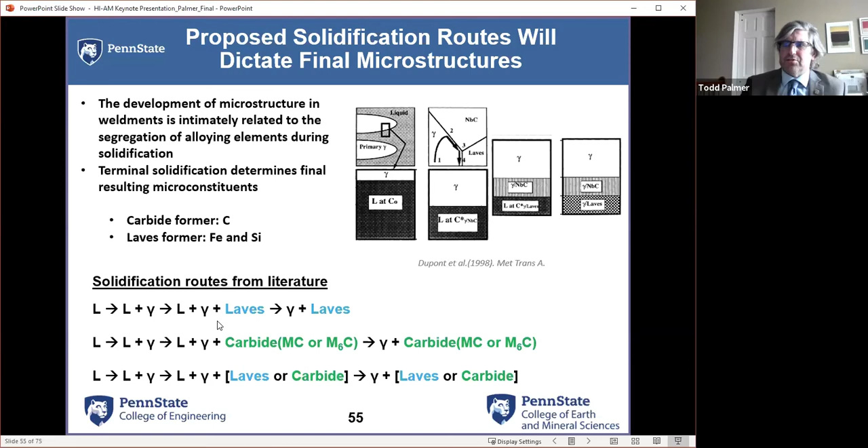Now we started looking at the literature, and this goes back to my old friend John DuPont at Lehigh, who did a lot of great work back in the 90s. So did Mike Cieslak and the guys at Sandia, really looking at solidification modes and starting to understand how Laves phase forms, and when you start welding some of these alloys, the issues you run into, whether you have carbide formation or Laves phase formation. And so they did a lot of great work, looking at various arc welding and overlays, and 625 is widely used across the maritime industry for weld overlays. Nuclear industry, it's constantly used in the same type of situation. And so this is Mike Cieslak back in even the late 80s, looking at how we need to control silicon, carbon, and niobium to limit this secondary phase, because there's this propensity to form these phases. And so they really were tying into the formation of Laves phase with the addition of iron. That was typically done through overlays and really the dilution of the iron from the underlying substrate into the Inconel. And so high iron was really traditionally linked to this idea that I'm going to form a lot of Laves phase.

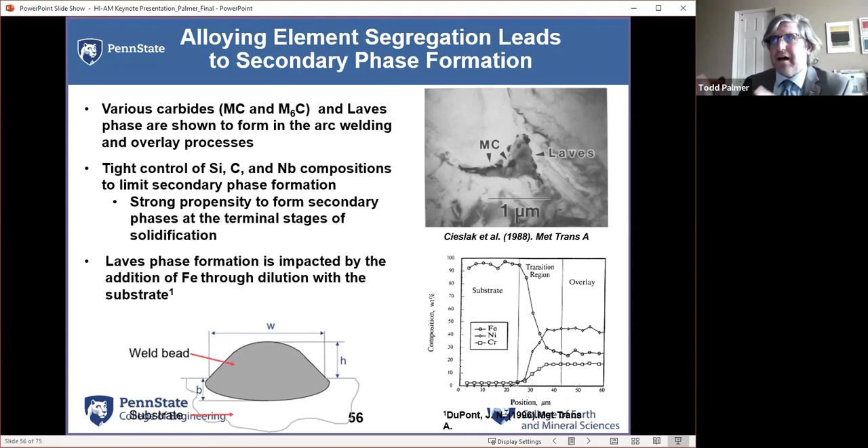Now we sort of did the same type of thing. What we started to see in our microstructures, and these are some as-deposited ones, is really these second phases. They didn't really change that much, but we had them.

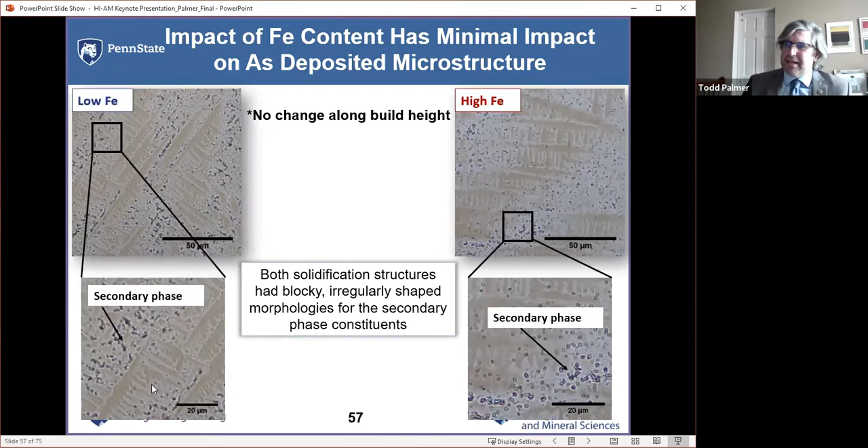If you look closely at them, they're not the same, they're a little different. What we tended to see with low iron content was differences in the chemistries. The low iron was rich in molybdenum and niobium, indicating a Laves-based phase, but our high iron content became rich in titanium, so these were really titanium-rich precipitates.

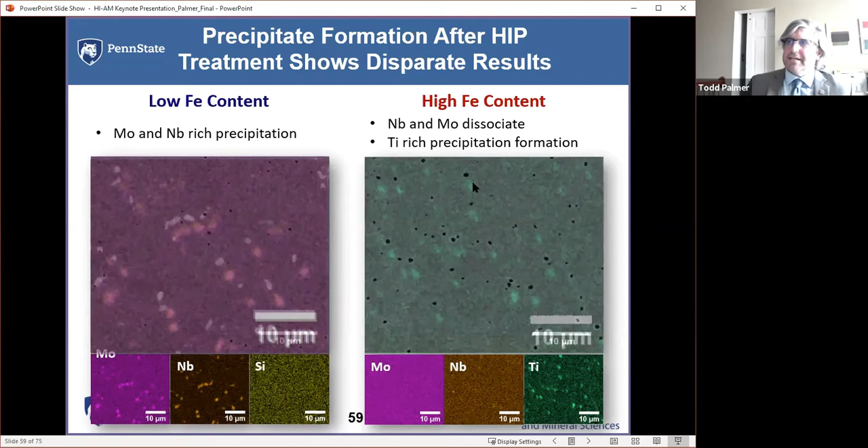How did this dictate itself? It came out as significantly different grain structures between low iron and high iron. We had huge growth in the grain structures of our high iron material. The other thing it did was we saw about a 25% difference in yield strength. So I've got materials that are nominally supposed to be the same specification-wise, with a 25% difference in yield strength. I've got some issues I need to work my way through here.

Now, the precipitate morphologies ended up being different. The low iron tended to be pinned on these grain boundaries, while the high iron tended to produce a little more dislocation pinning.

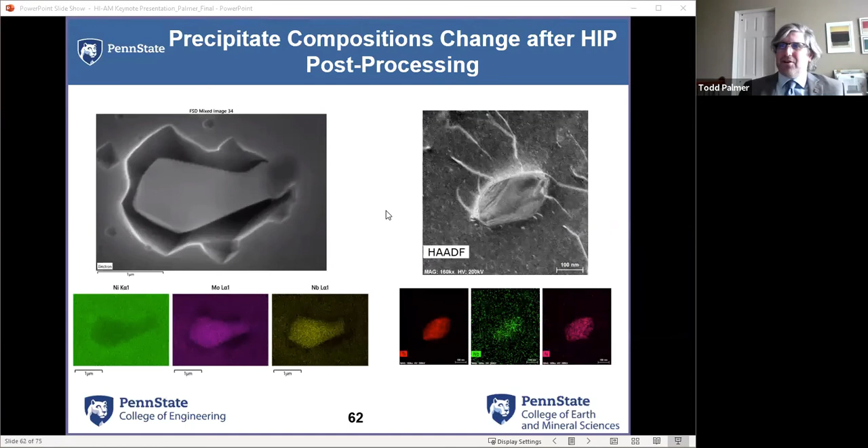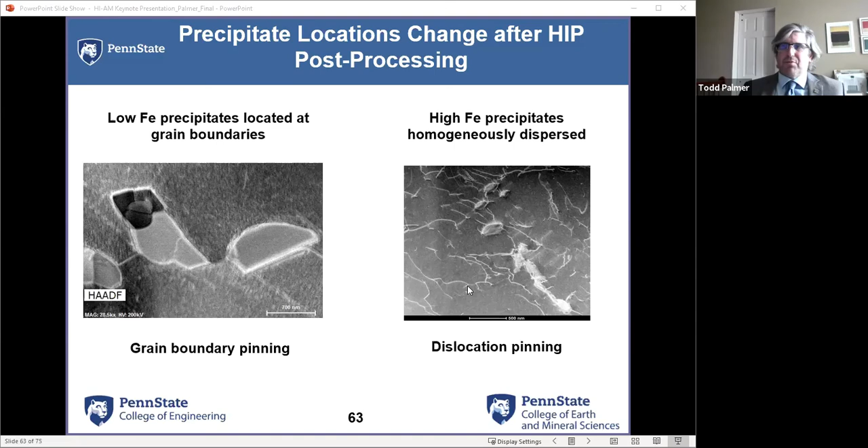So let's get into the future directions. I have a lot more here on this, but I want to cut it short. What we see is each of these precipitates are different, so the change in iron content actually impacted the precipitates present in the materials. This leads us into the future directions.

Thank you, Todd, that was a great talk. I must say I've learned a lot about additive today. I'm not in that field, but yeah, it's really been great. I would hope you would say I learned a lot about welding.

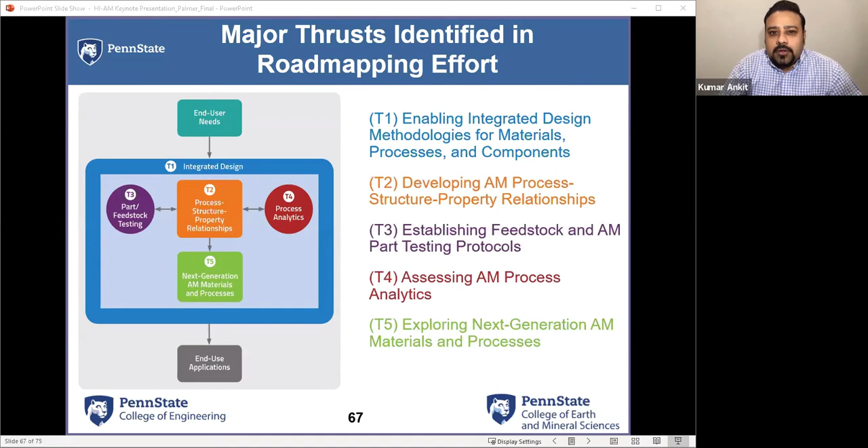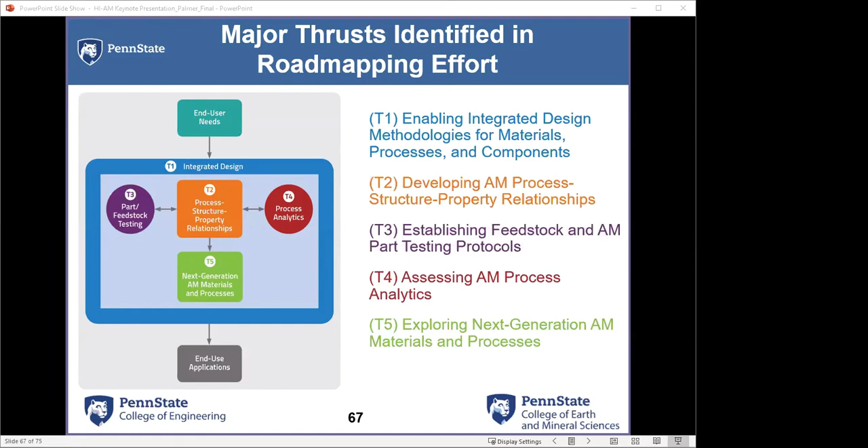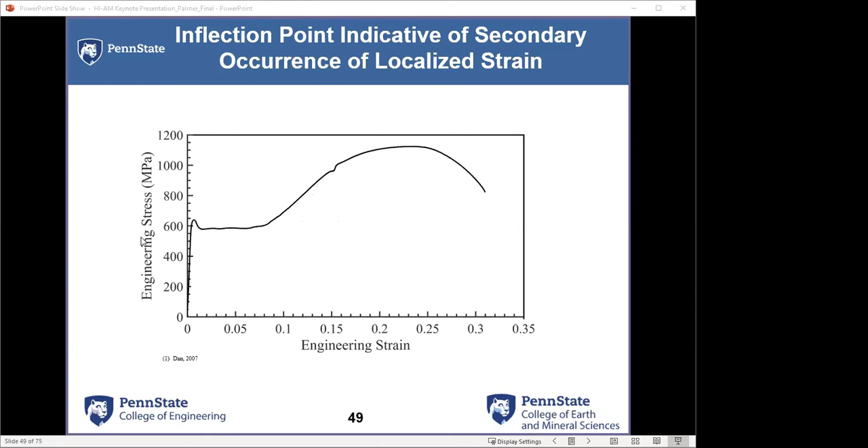Hi, Professor, this is Jamal, and it was a great talk, I learned a lot actually. I'm a PhD student in aerospace engineering, doing research in the powder bed fusion process field. My question was, during your nitrogen atomization process, how reactive was the nitrogen to the other alloying elements, and was there any intermetallic compounds as a byproduct of the process?

So I'm trying to run my way back through these. When you start thinking about it, you have to think about what the material is in your melt before you really start thinking about reactivity. Say if I'm going to atomize titanium, I would be foolish to use nitrogen, wouldn't I? Because what am I going to form? I'm going to form titanium nitride, so I'm going to make gold powder. Austin Powers might like the idea of this gold colored powder I'm making, but it has literally no purpose. Now, when we're talking about using nitrogen, what we tend to find is that people will use it as the atomization gas in materials that it's compatible with. Stainless steels have a high solubility for nitrogen, so that's why the nitrogen levels went way up.

It wasn't so much that we were forming a lot of nitrides, although we did, but the iron itself has a high solubility for nitrogen, so it's great to use that. Nickel, on the other hand, tends to have a lower solubility for nitrogen. So a lot of the 625 alloys you might buy are atomized with nitrogen. There's a bit of an issue though - nobody measured the nitrogen in nickel-based alloys before because there's no solubility for it, supposedly. I was guilty of saying that too, that there's no solubility for nitrogen, so you can probably use nitrogen. We actually went back and measured the nitrogen contents - I didn't talk about it here, but they're higher than they should be, and we think they're impacting some of the follow-on precipitates we're forming. So I hope that answers your question - it's alloy dependent.

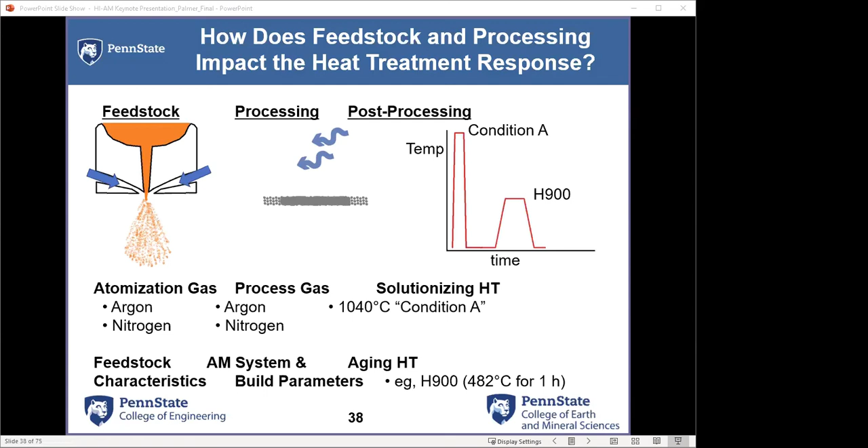I'm not sure if that answered your question, but yeah, it does. And just really quickly too, you mentioned that powder packing was a little bit more important than the flowability itself, is that correct? Okay, so yeah, it's more in terms of what's happening. I mean, there is some flowability aspects to spreading a powder with a blade, but not quite to the same extent as flowing a powder through nozzles.

Okay, all right, very interesting. Thank you, thank you, Heather. I have seen Bruno very impatiently trying to answer, he had a good question, I suppose, right? So yeah, Bruno, he's a colleague of mine in Poly School, and yeah, Bruno, go ahead.

Thank you, Kumar. Thank you, Krishna, for organizing this, and thank you to our speaker. I really enjoyed the talk, and we've been working a lot with powders in our lab, so it's really exciting to see this, and most of my students, if not all of them, are here today. One of my questions is, what are some of the strategies, whether it's heat treatment or other approaches, to introduce and play with the powders and mixtures of powders to try to get rid of some of these uncertainties? A lot of the things you talked about today felt like uncertainties that need to be considered, but how do we make it simpler? What are some of the strategies? Is it possible to introduce certain nucleants into the powder bed or mixture to standardize how we get the final structure, or introduce a bit more forgiveness in this process? Even the nitrogen content, for example, the difference in content on the absolute scale is very small, but it showed such a dramatic effect. So some of these things are really interesting, but what are some reasonable strategies that we can use to negate or reduce the uncertainty levels?